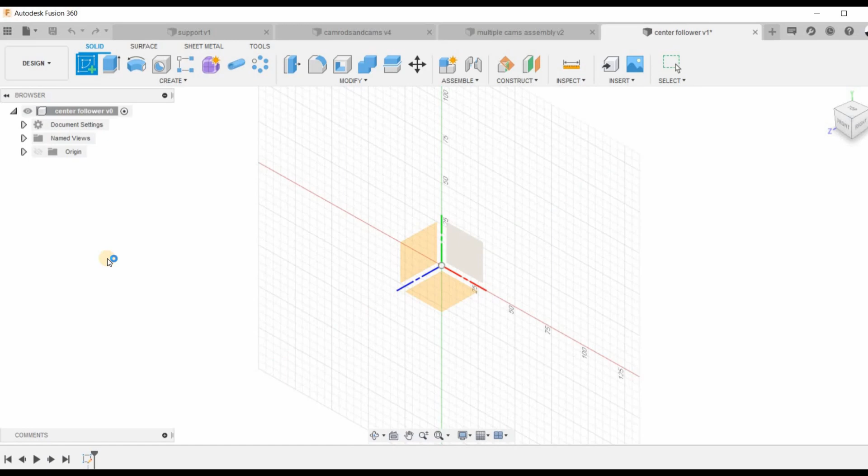Now I'm going to create the follower. So I'm going to first create the center follower. So I'm going to name this as center follower. So as we have just checked, this radius has to be 15, that is diameter 30, and click OK.

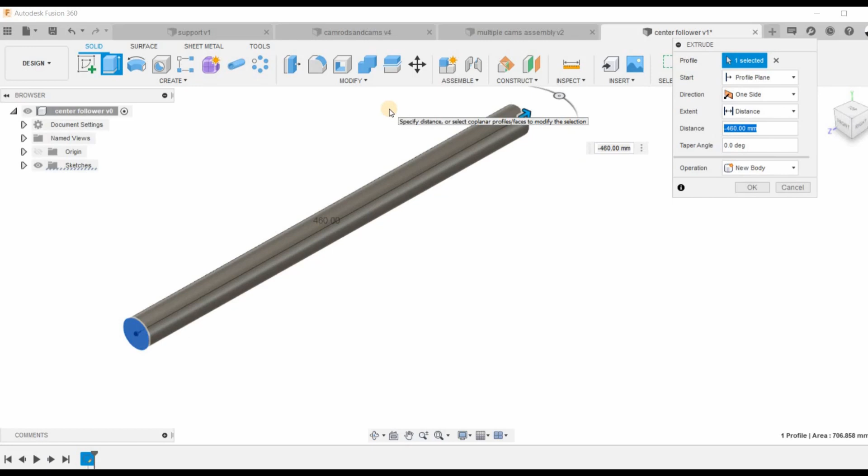Currently I'm going to give some extrusion, but later, depending upon the pattern that I need, I will change it. So currently I'm giving it as 460 and click OK.

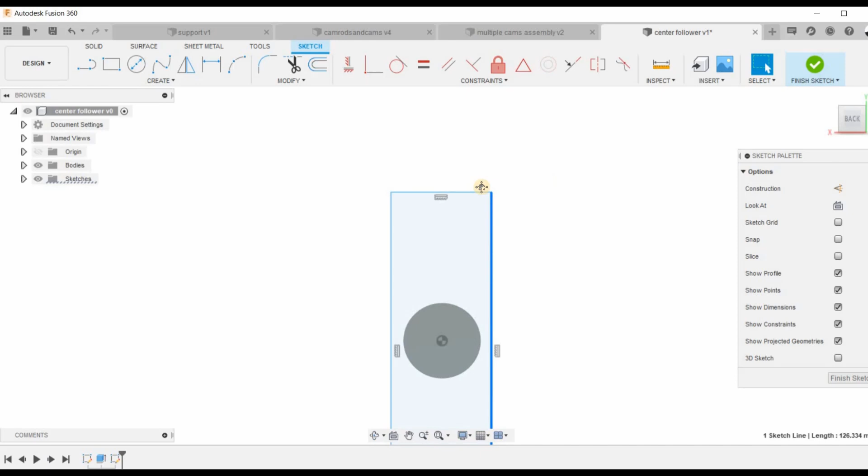Now this should not actually interfere with the side-by-side followers that will be there. So we'll keep this to be minimum. So let me check this dimension. So I'm going to give it as 40. And from here to here 20.

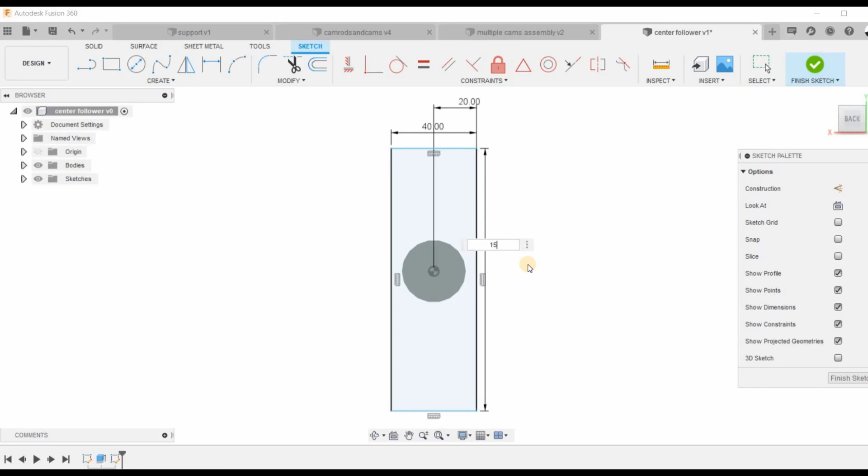And this distance we had checked over here, approximately this distance we can give, or we can give it a little bit more also. So let me see. I'm going to give it as 150, which I'll again change if needed.

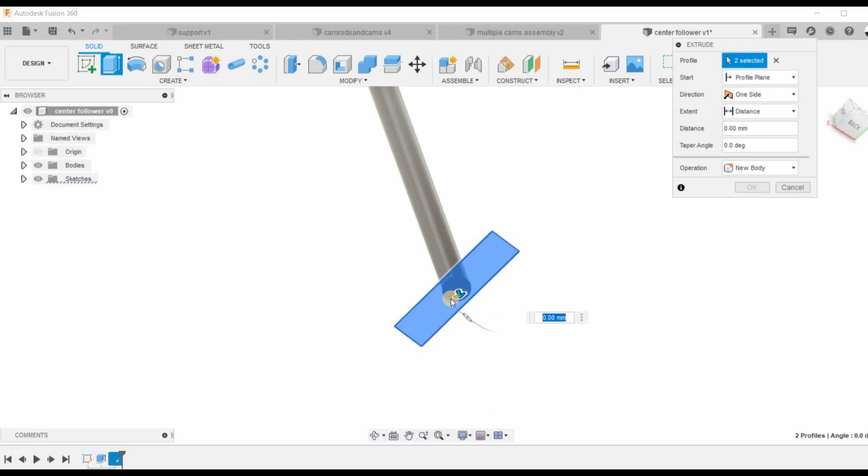So here I can extrude it. I'm going to select the circle also, and I'm going to extrude this by 10 mm. So my center follower is ready.

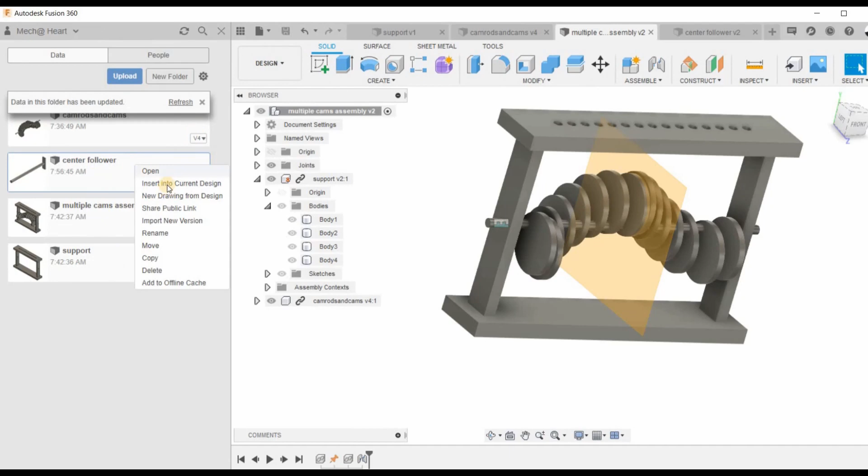Let us take this to the multiple cams assembly. So here we have the center follower. Go and see insert into current design. Okay, and it should go exactly in the front, into the middle circle it should meet with.

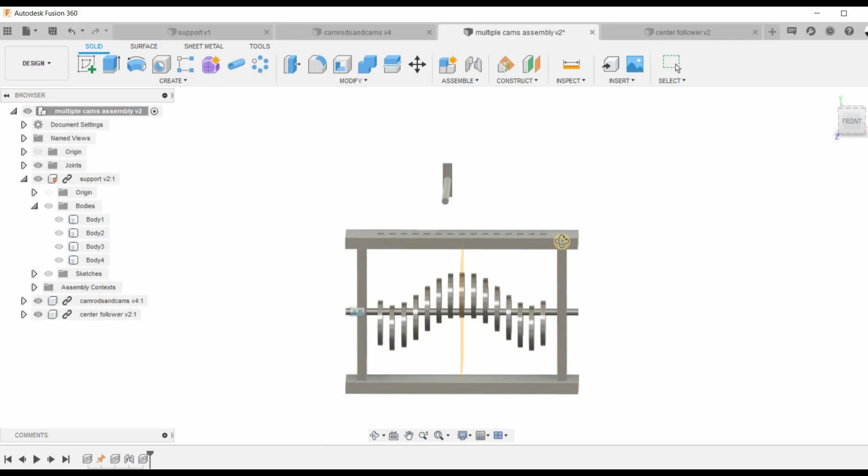So I'm just clicking OK wherever it is, and I'll be just pulling it over here, and then go for join, capture position, this one and this one. Okay, but we should flip it because it should be this way.

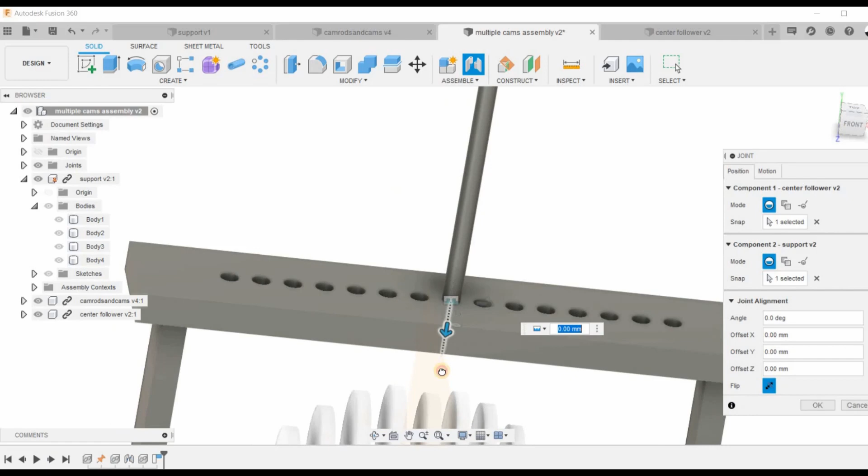And again, as how we have done previously, I'm just going to keep this at this height currently. And instead of rigid, we have to give this as slider so that it can slide. We will be calculating the limits that we need to give shortly. Then click OK.